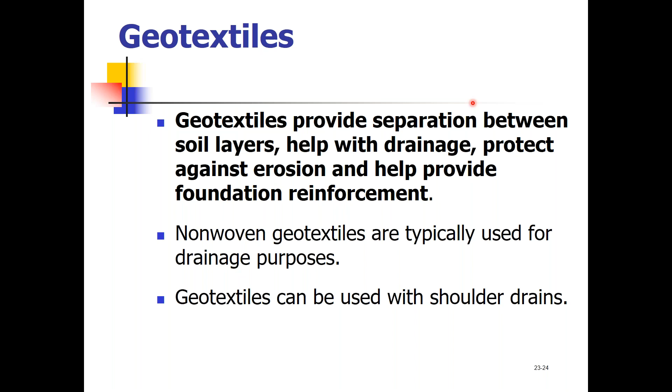When we are using geotextiles, we typically use the non-woven geotextiles. That allows the water to get through the geotextile instead of pooling. And we do also use our geotextiles when we're setting out our shoulder drains as well. To give you an idea of what I'm talking about, we have our pavement layer right here. We have our aggregate layer, and then we have our subgrade, our soil, the base from which we're working. If you'll notice, we place the geotextile material in between the aggregate and the subgrade. We talked a little about this, I believe, in the first webinar. Let me show this to you.

You can see without a fabric in there that there is no way to separate the rock from the soil. And so when a tire goes over that area, it's going to press the rock down. It's going to press the soil down. That's not very good compaction, which we spent a lot of time at the end of Thursday's webinar talking about.

But notice when we put the geotextile between the soil and the rock, it gives a layer of extra protection there that allows the two ingredients to stay separate, and it also gives us a much stronger base to work from. Notice there's a whole lot of air voids and area between the rocks and the soil right there, but with the fabric, it allows the soil to stay where it is.

It allows the rock to stay where it is, and we are able to get those air voids out, hopefully allowing for a much smoother ride for the motorist. But even more so than that, we're allowing for them to have the opportunity to have that road last a whole lot longer, so we're not having to dip into taxpayer funds.

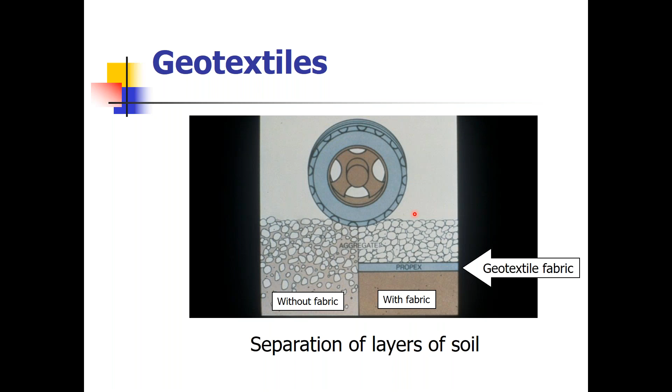When we talk about shoulder drains, which we mentioned two slides previously, I want to give you an idea of what that might look like. You see we have the pavement on top as it was previously shown. We've got some soil out here. We would represent a fabric, a geosynthetic, right in there, geotextile. Again, we have some aggregate, and notice we've got our pipe right there.

And what we want to make sure, and this picture doesn't do it maybe to the level that I would like, we want to get as much of the air voids out of that area as we can to make sure we've got good compaction. What we don't want to have happen is as vehicles, especially the larger, heavier vehicles, go over our pavement, that gets pressed down, this gets pressed down. You don't want a ton of air voids in there. We want to make sure we get that out as much as possible.

But this is our spot. This is where we want the water to flow through. And if we don't have good compaction around it, that pipe is liable to give. It may sink, it may roll to the side a little bit. And again, we're not going to have water flowing the way that we want it to. And of course, it's not exactly to scale. Our pipes would be larger than that. But this is how it should look on a subsurface or a shoulder drain.

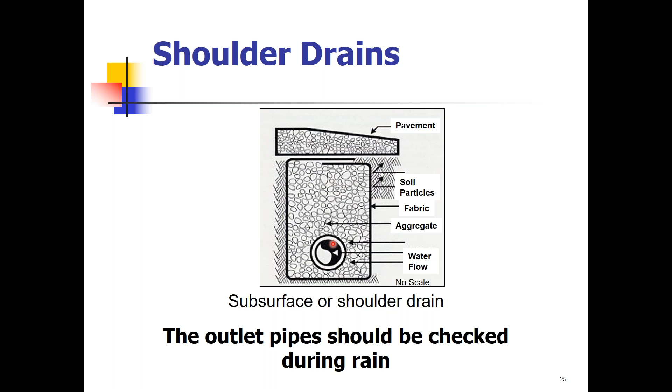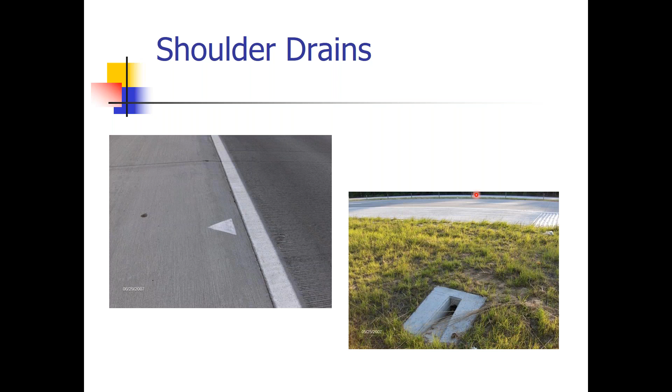And we're going to spend a lot of time today talking about when it's raining, what we're looking for. It's really important to check your outlet pipes when it's raining to make sure they are fully flowing, not partially blocked nor damaged or cracked. Sometimes we have vegetation that grows up in between them. So it's good to inspect those on a rainy day as often as possible. We have some shoulder drains here. Here's a nice example of one out here. Hopefully that water is getting off the road and getting down to where it needs to go.

Here's a median shoulder with a drain outlet, and this is not a guardrail class, but I do want to touch on something while we have this cable guide rail or guardrail up here, depending on what your state refers to it as. Oftentimes, when we talk about cleaning back the area, we've talked about making sure that it's free of debris and vegetation that may block the flow of the water. So what we'll often do is come out here and spray chemicals and such to clear back this area.

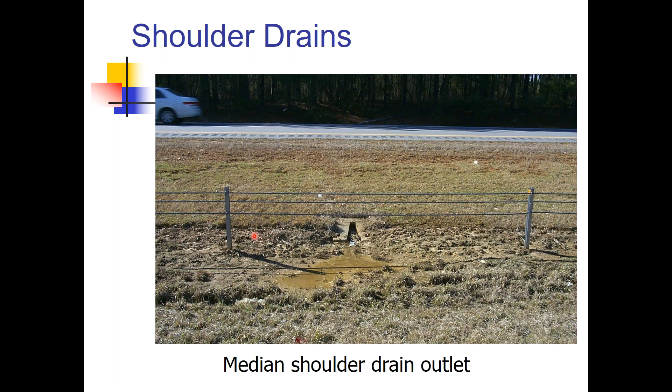One thing to be mindful and careful of when you come out here and you're spraying chemicals: over time that actually weakens the soil that's around these posts. And even though you may not physically be able to tell it with your naked eye, those posts are not mounted as well because that soil is loose. And if a vehicle goes off the road and hits the cable guide rail, it may not function the way that you want it to. So please keep that in mind when you're doing your maintenance work around these cable guide rails or guardrail, that we're not destabilizing the soil too much, or this will not function the way that we need it to.

Depending on the state that you're in, you do not want to exceed how much space you have between catch basins. Some states have 400 foot as their maximum spacing. Other states have different ones. Make sure you consult with your engineers just to make sure they're at the correct spacing.

In a vertical sag location, it's a really good idea to have more than one catch basin because we want to keep that water from ponding. And if one of those inlets gets clogged, that water is going to come right out onto the road. So oftentimes we'll put more than one catch basin to kind of help reduce the potential for that ponding. Or if one gets clogged, there's still one that's flowing.

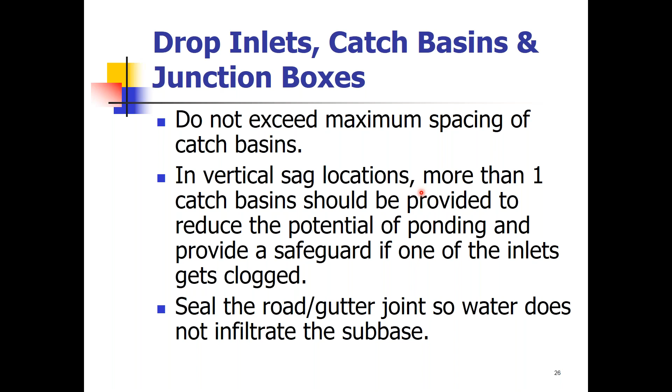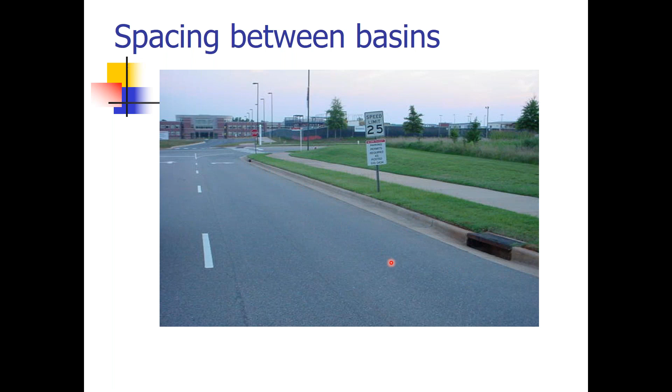We talked in our first webinar, make sure the joints are sealed properly, the road joints, the gutter joints, just to make sure water's not getting into our subbase. We're keeping that away as best we possibly can. Here's some spacing between basins. That's a good spacing because what one basin doesn't catch, hopefully the next one will. And again, our goal this entire series of webinars has been capture the water, get a hold of it before it actually makes it out into the highway area.

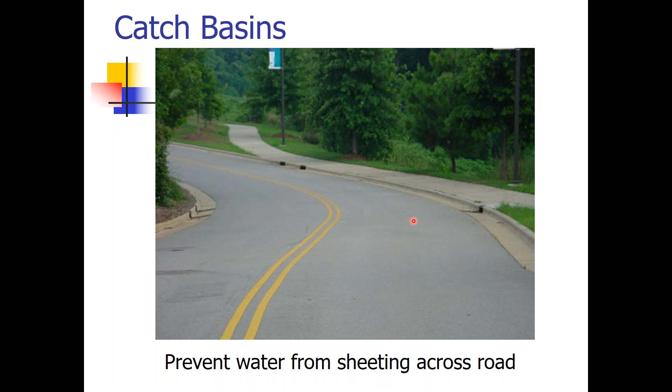And to that point, we have some more basins that are connected up here, and we actually have a third one out here. And the idea is we are defending the road. We are keeping it from ponding or the water sheeting across the road and thereby creating a hydroplaning issue for the motorists, especially coming around curves when they are not able to see what's coming. If there's water pooling or standing right there, they're going to run right through it. So let's help the motoring public as best we can to keep this from taking place.

Now, again, still part of a drainage course, but I do want to touch on this. We have bicycle safe grates that we put down. And the reason we put down these bicycle safe grates is exactly what it says. Well, bicycles tend to run over them. We don't want bicyclists catching their wheels into the grate. That, number one, becomes a tripping hazard, it's a falling hazard. And unfortunately, in our country, one of the items in pedestrian and bicycle safety are traumatic brain injuries. And this could be a potential for someone to suffer one of those injuries. So we make sure we use bicycle safe grates.

By the same token, and again, this is not an ADA class, but be thinking about this when you're looking at your items. You want to make sure that if a person is walking, let's say with a cane, and they're tapping that cane, that there's no potential for that cane to get wedged in those areas in the grate. If that happens, that's a very serious tripping hazard, especially for those that need a little more help. So let's make sure we don't have these too wide. It's very important, not only on the pedestrian side but on the bicycle side. Together, they work as part of our drainage system.

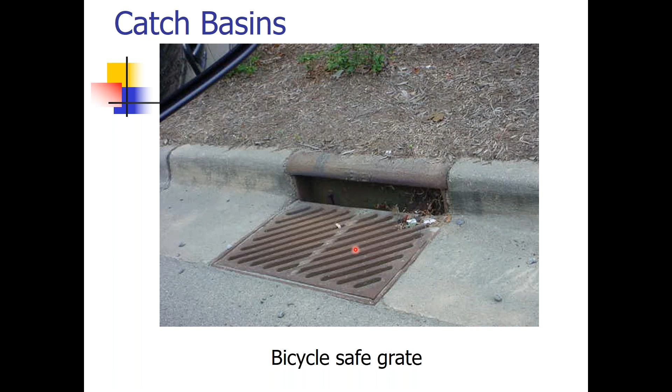Here's more than one catch basin in a sag vertical. Again, that's a low spot. So we have not one, but we have two to help collect as much water as we possibly can.

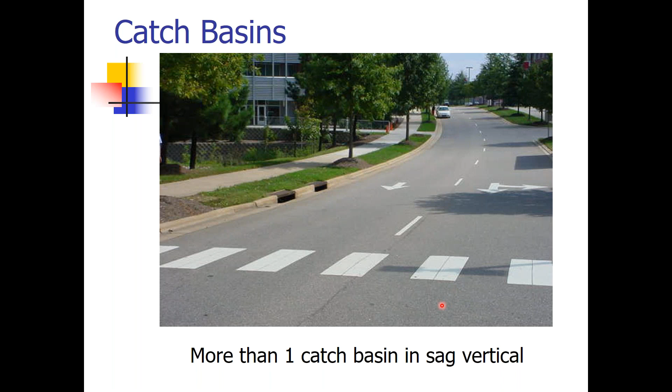I want to talk about some of the old designs on the catch basins, on the inlets. And I say old design because you'll still see these type of designs out there depending on where you are. And again, we're not going to spend a ton of money coming in and pulling all that out and retrofitting those typically until it's a necessary design that we need to undertake. But this is the old inlet design. And you can see where there's all this cracking taking place, and the pavement needs help.

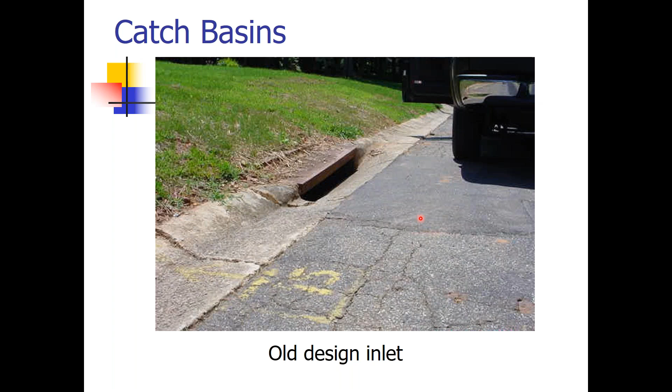What happens when we go and we resurface this? Well, unfortunately, if we're not careful, our catch basin could end up looking a little something like this. Hopefully you can see that very well. What they did is they came in and they resurfaced the pavement, but unfortunately, there's very little opportunity for water to make it into that catch basin. So what do we have to do? Well, you're going to have to come in and cut this out so that the water can flow properly. You may actually fix the older inlet design at that time, but you're going to have to do something to keep that water flowing and getting where it needs to go.

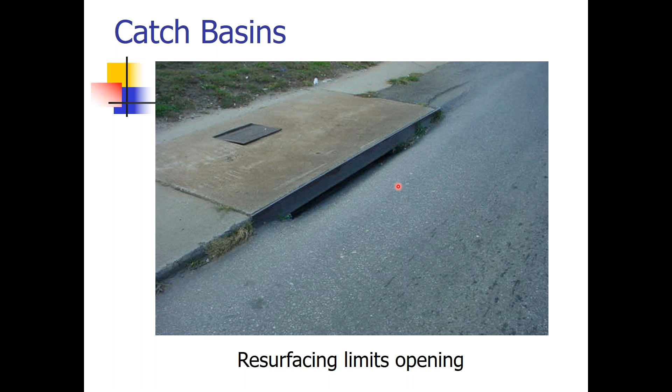This probably is something everyone on this call has seen before, and those are catch basins that have a whole lot of dirt, whole lot of soil, whole lot of grass in them. And this is not something that sprang up yesterday. It's been growing for a while.

It is critically important that we do our maintenance as often as possible and keep up on things as best we can, because as these things begin to back up, water is not going to flow into that, obviously, but where will the water go? Well, the water is going to go here, and then it's going to go out, and it's going to go around. And again, it may end up back over here, but the problem is it's going to end up on the pavement. And you can already see a little bit of cracking taking place there. And it's also a ponding hazard, a hydroplaning hazard as well. So routine maintenance, very, very critical.

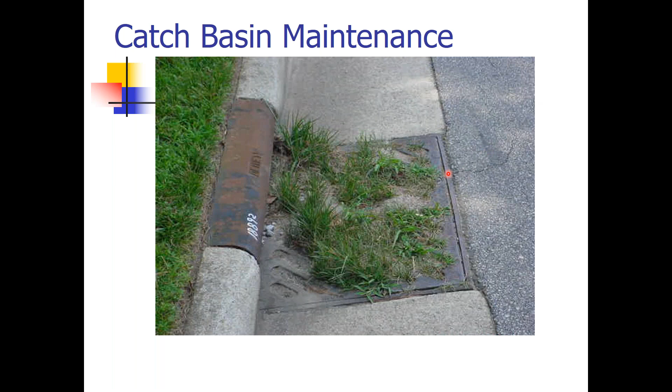Now, this is especially true around the fall, because you end up with situations sometimes like this, where a well-meaning homeowner has stuck all of their leaves, all their little twigs, all their dirt into the catch basin. I can't tell you why they thought that was a good idea. I can only tell you experience has taught me this happens more often than I really want to think about and admit. And so what happens, we have to come in and we have to clean this catch basin out, whether we're using a vacuum truck, whatever it is, we have to clean it out so the water is going to flow properly into the catch basin.

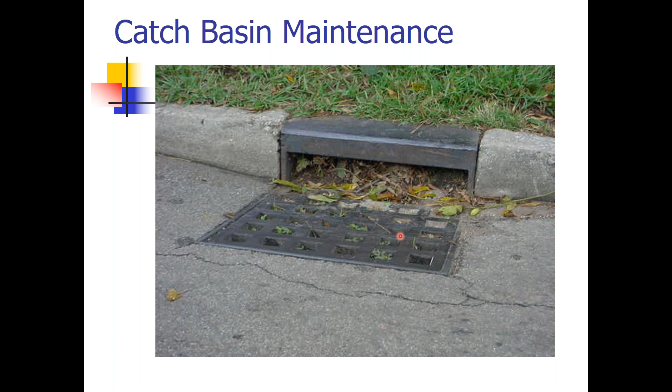Certain areas tend to flood more, especially in new construction areas where there's no drainage set up. Oftentimes we'll see signs, left lane closed due to water or whatever. Make sure that in construction areas that you are keeping an eye on the maintenance and the water's flowing the way that it needs to.

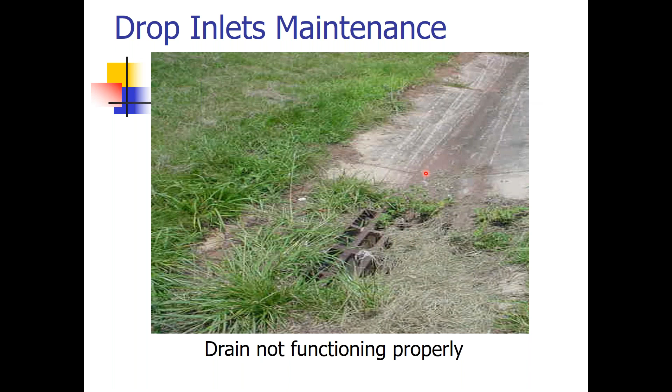Perhaps we'd have an issue like this where the water's supposed to flow and then you have a massive drop right here. I assure you, no water from here is ever going to make it to that drop inlet. We need to make sure that we build this area back up, that we grade it, that we get compaction, that it's smooth, and the water is able to flow to the actual drop inlet. It does no good to have this out there if the water's never going to make it to it.

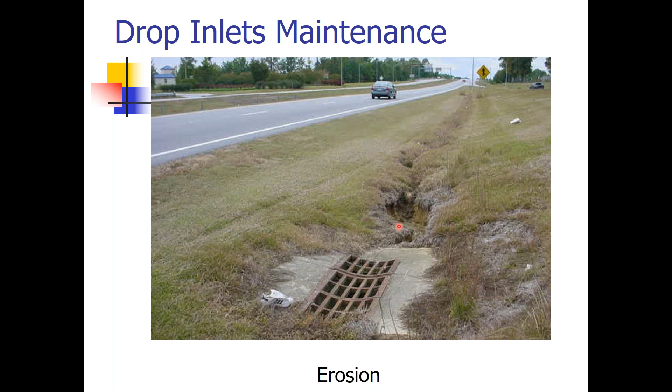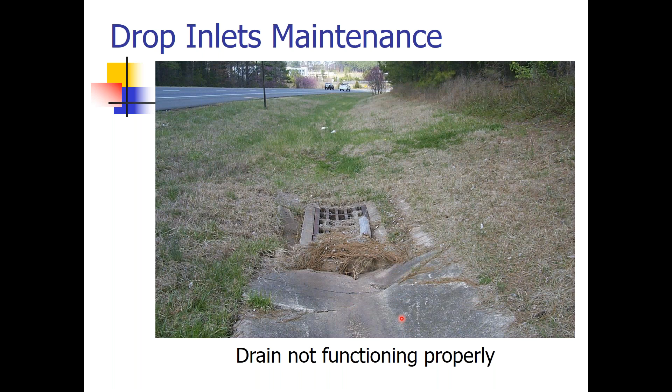Here's another example of a drop inlet. It's just not functioning the way that we want it to. Again, you want to make sure you clear all this back so the water is able to flow properly down that paved flume to get to the drop inlet.

And again, we talked just a few slides ago about when you spray herbicide under the cable guide rail, you want to make sure that you don't do it over long periods of time because that gets destabilized. And if a vehicle hits that and that gives at all and it pushes into this area, it can cause some major issues for the motorist. So we want to make sure that we're being conscious of what we're putting out there. Now, let's play a little game of hide and seek.

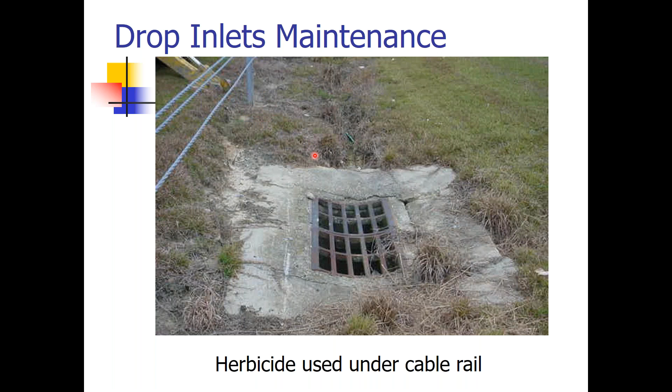There is a drop inlet in this picture, but I want you to look at it, and obviously I can't see your response, but just take a moment and with your finger, I want you to point on your screen where you think the drop inlet might be, because there absolutely is one there. So just take a second and look around in this picture and just kind of think where it might be.

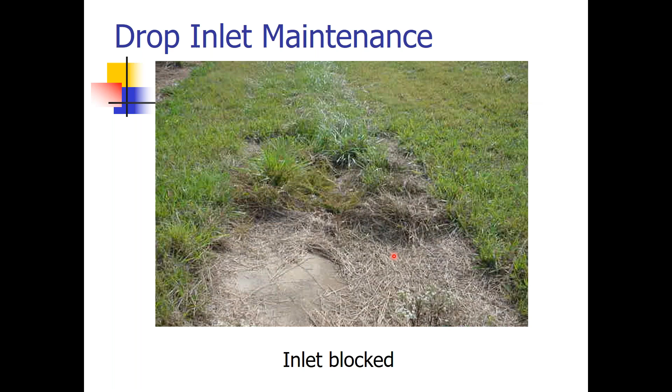And once you've done that, let's go ahead and look and see when I pulled it back a little bit, where the drop inlet actually was. And there, I pulled back just enough so we're able to see where the drop inlet actually is. And is that a major problem? Oh, I think it's a very major problem because that water is not flowing anywhere but over the top of it. So we want to make sure when we're looking at drop inlet maintenance, when we're doing our rainy day patrols, when we're identifying where our inlets are, make sure that they're open and free and clean.

Here's some more drop inlet maintenance. We've got some high water or some high vegetation here. We want to make sure the water is able to make it to the drop inlet entrance, and we want to get that cleaned back as best we can as well. Not just drop inlets, not just catch basins. I want to touch briefly on junction boxes and maintenance.

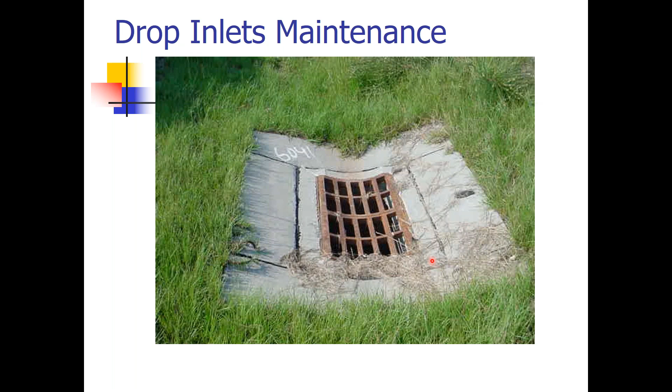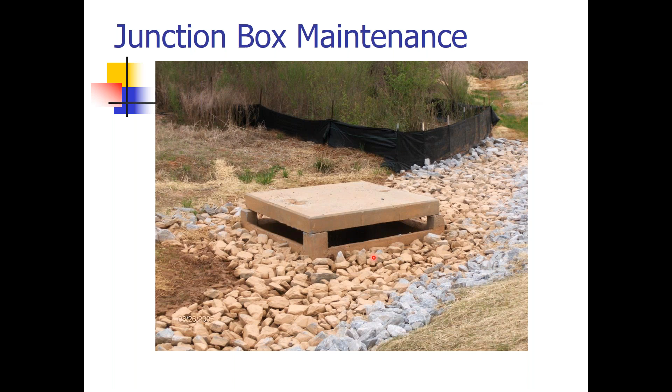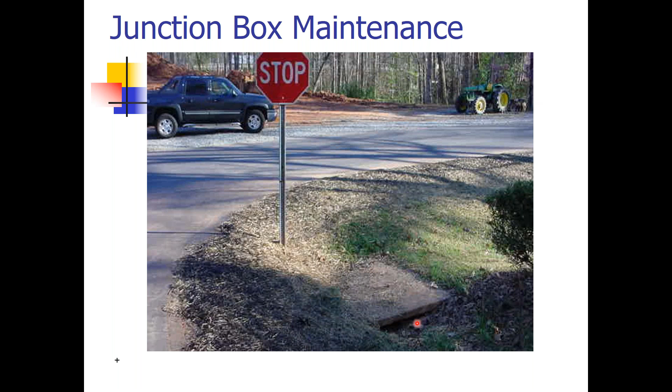Here's another junction box. We could probably clean that up a little bit so that the water is able to flow freely the way that we want. Now, having looked at junction boxes, I want to talk really briefly about box culverts. And I want to point this out because I think it's really important. Routine maintenance of your box culverts is just as important as if you're looking at pipes and as you're looking at ditches. If there's some type of drop off at the end of a box culvert, it's usually tied to the fact that there's some erosion around the outlet, and we'll talk a little bit about that here in just a minute.

And this is one I want you to underline. If you have the printout, I want you to highlight it. I want you to put an asterisk beside it. We do not use riprap in live streams. What does it mean that we do not use riprap in live streams? Well, you remember, if you were with us on Thursday, we talked about riprap and rock check dams and using rock so the water flows through the stone, through the rock, but the rock is able to block out the impurities, the silt, the sediment, the dirt, whatever it's pulling with it.

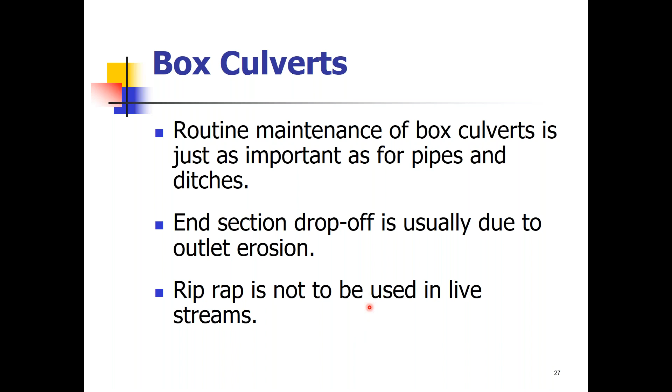When we place riprap in a live stream, we run the risk of that stone or that rock being carried by the live stream down to our piping, down to our inlets, down to our basin. So we want to make sure we are not putting riprap in a live stream. If we have riprap in an area and there's a live stream coming through, we need to get that out as soon as possible.

Again, box culvert maintenance, we want to make sure they stay clean, they stay clear of debris. Depending on the area that you're in the country, there may be critters and such up in there. Please be very careful when you're talking about box culvert maintenance. Be responsible. Be very, very careful and be mindful of your areas. And again, that may not be confined space required because it's pretty open. But that also means you can get some bigger things in there.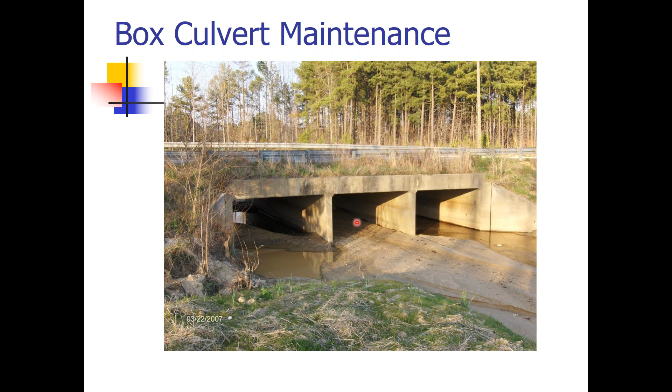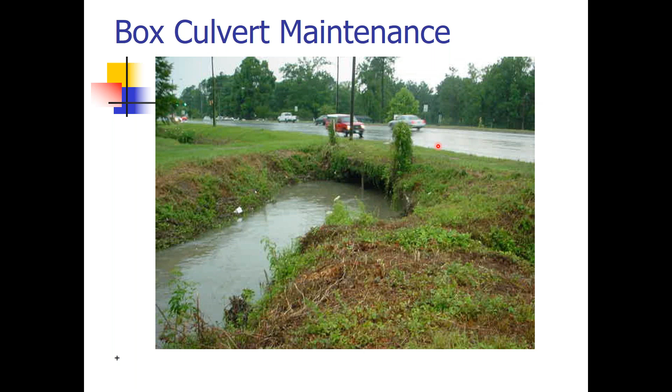So please, as part of your safety, I know you're wearing your PPE, your personal protective equipment, but just be mindful of the areas that you're stepping in and what you're doing. Again, here's another example. It's just some box culvert maintenance that needs to be done. Again, we've got a lot of water flowing through there. I want water flowing through there. Remember, we want to get it away from the roadway as quickly as possible. If we can't intercept the water, at least get it away from the roadway as quickly as we can.

I want to touch on end treatments. They're very important. In guardrail, we understand we put in treatments on the end, very simply put, because if someone hits them, we want to make sure the person survives. They don't get speared. On the drainage side, when we put in end treatments, there's a little bit different reason for what we do. We use end treatments when we need to stabilize the slope that is behind a pipe end.

And I'll put this out to everyone. Go ahead and answer in the chat box if you would. What might be some of the reasons we need to stabilize the slope behind the end of the pipe where the pipe is sticking out? What might be some of the reasons we need to stabilize the slope area? So I'm going to step away for a moment. If you'll go ahead and start typing your responses.

They've put in prevent scour, erosion, landslides near edge of road, pavement infiltration to avoid water undermining the pipe, to avoid settlement, scour prevention, lack of right-of-way to allow proper slope, end of water flow, filling head wall, control slope, and control speed of drainage, hold roadway in place, slow down outlet water. And all of those are excellent answers, and they're all correct. I want to add one more to it, and Victoria, if you read it, I do apologize, but I don't think I heard it.

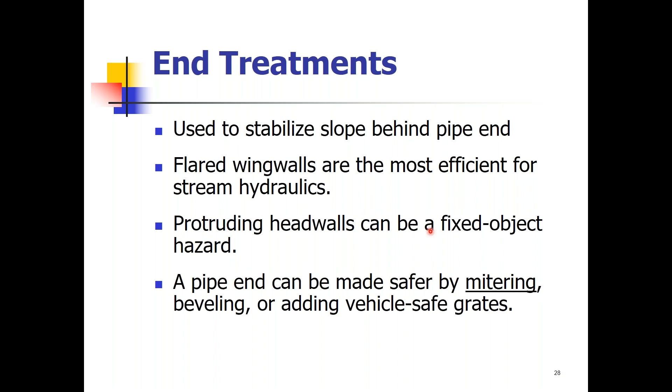And then we're going to talk about how a pipe end might be made safer by mitering it. Maybe we bevel it. And then we're going to look at what are called vehicle safe grates as well. Again, this is a mitered end. You can tell if you stuck that pipe out further, it would be very difficult to get coverage based on that area. So we come in, we miter that end, we cut it so that we have less need for a bunch of fill and compaction. We don't have a lot of room there, but also notice water's still going to flow out of that.

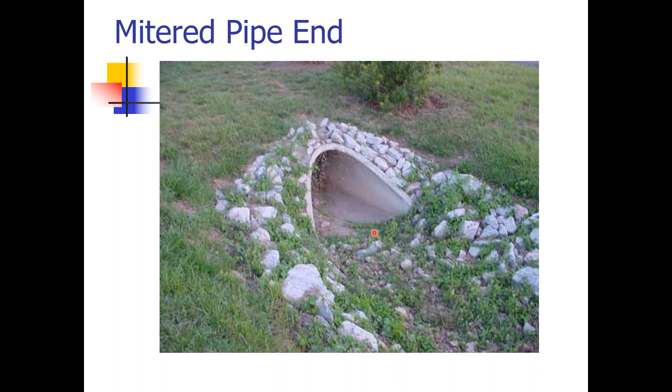Instead of it being rounded, it's going to flow in a little bit different way. It's going to move a lot. We still have to worry about scouring or erosion right here where the mitered end of the pipe, in this case a concrete reinforced pipe, meets where the soil is. But that's one of the things that you want to look for when you're doing a rainy day patrol or some form of an inspection.

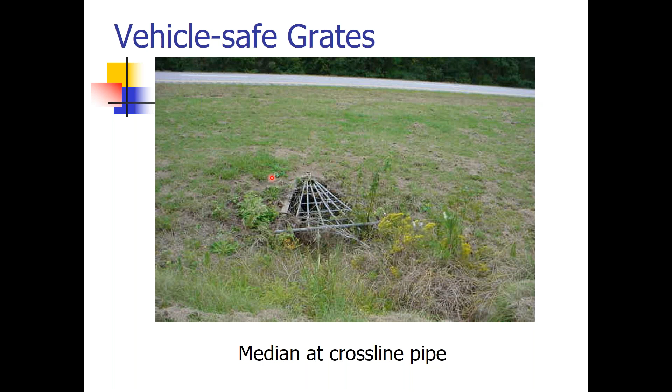Here's another median. We have a cross line pipe. What is a cross line pipe? Well, it basically goes across the roadway, and they put something over it to just be safe in case something were to drive over it. Again, I would hope no vehicle made it out there, but as everyone is fully aware, things do happen. They happen very quickly.

We talked about flared wing walls. Here's an example of one, and I just want to take a minute or two on this. You can see that's a very large reinforced concrete pipe. That's excellent. It's rounded. But notice, instead of just leaving the pipe rounded out there, and this is the term that's up there, they flared them out to the side. And the reason that they flare those out to the side is as the water rushes through, especially if there's a lot of volume coming through in that waterway, it's not just going to hit here and then stop. It's actually allowed to flow out to the side.

So hopefully the water doesn't back up. And those are really good. And you can tell they've got riprap, they've got stone around it. That's a really nice setup.

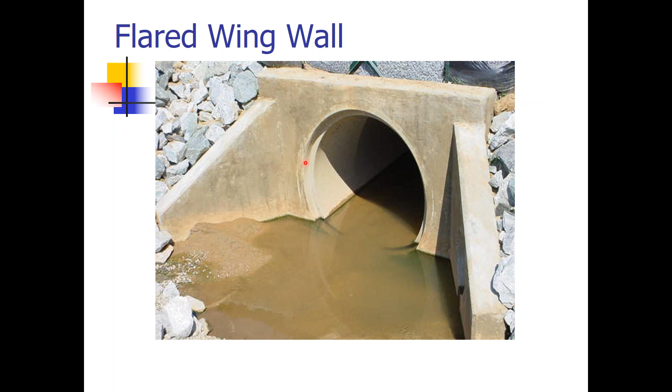But here's where fixed object hazards come into play, especially if you're dealing with any older designs of these, and it may look a little something like this, may not look like that in your area. But the reason that these become fixed object hazards is because, whereas this one's a little tougher to hit, and again, we can't see the roadway exactly, we can see here that if a vehicle goes off the road and it were to strike that reinforced concrete, it's definitely going to do damage to the vehicle.

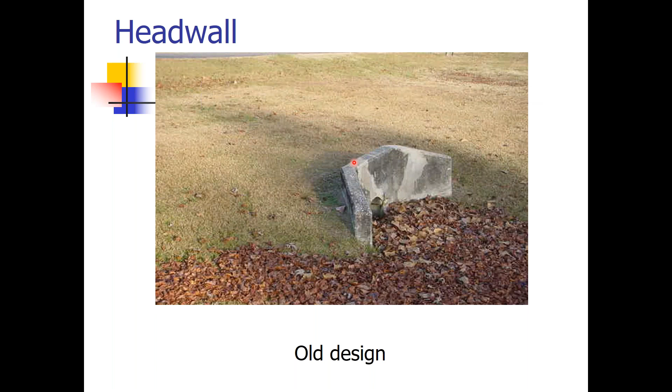Now, when we hit crash tested stuff, it can still damage a vehicle. That's not to be avoided, but there should not be fear by the motorist of losing their life. You hit this thing going really, really fast, that could cause a severe problem. So again, this is the old design, and unfortunately, this creates a bit of a fixed object hazard. We want to address that if we can and as the budget allows.

Again, here's just a basic head wall. It's not the flared wing wall, so this means all you're going to have is the water flowing through the rounded pipe. And there is the potential, even though you have riprap, you have rock on either side, that water might back up. And that's the difference with why the flared wing wall may be better for getting a large amount of water through as quickly as possible.

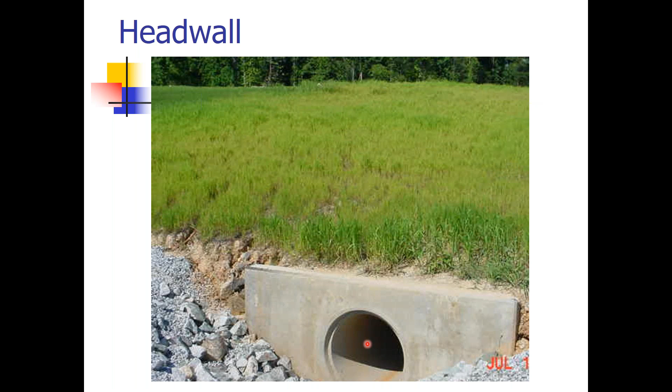We go into neighborhoods, you see a lot of these driveway pipes and these head walls in there. Again, how much water are we moving? I don't know. It depends. But you need to make sure the water is flowing, and then you need to make sure this ditch area is the right shape, so it's going to move a good amount of water, hopefully down through the next driveway pipe until we get it to where it's going to go.

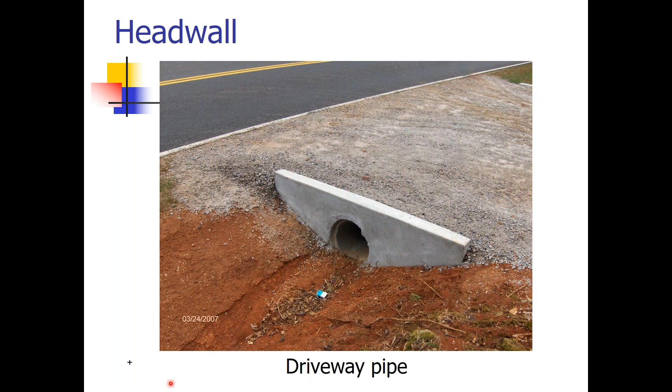When we talk about appurtenant structures, what are appurtenant structures? Well, we use them to maybe improve what our drainage is doing, or maybe we have an erosion problem and we want to be able to reduce how much erosion we have. We use energy dissipators for appurtenant structures. This is where we talk about using riprap. And the reason we often use riprap is not just to stop the soil or the dirt from moving, but also it's going to slow down the flow of water, especially in places where the velocity is really, really high.

Water's flowing and it's flowing hard, and it's going to cause erosion. We will put riprap in there to slow that water down. Again, not just because we're worried about what's getting into our catch basins or into our drop inlets. We're concerned about how fast the water's going. And if it causes erosion, all that work we have up here is for naught, because the water's never going to get where we want it to go.

We use funnel drains sometimes to collect surface water, especially on roadways that become what are termed high fill sections. In other words, there's a lot of fill taking place and there's a lot of water moving through. So we will use funnel drains to help with that as part of our drainage system.

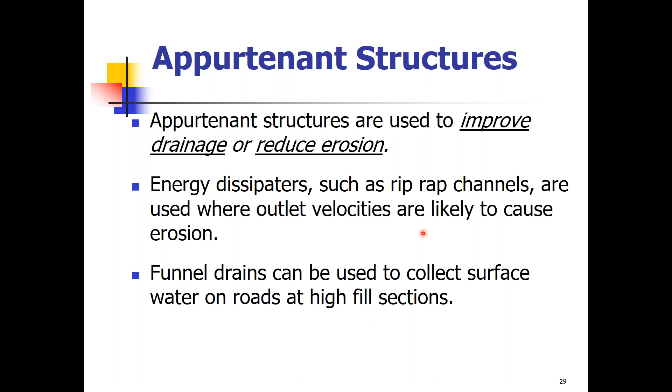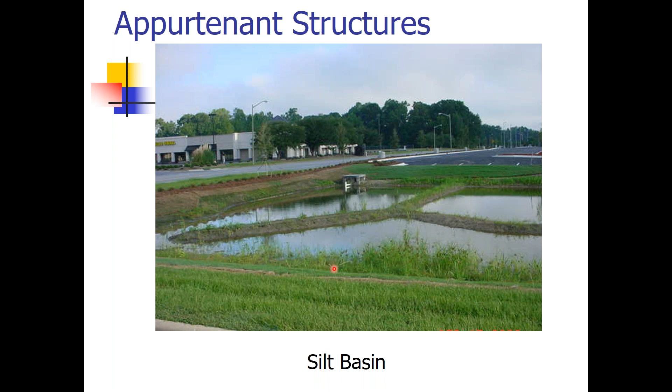Here's just an example of a silt basin. We have the water being captured right here. And if that's not something you use, you might be a little more familiar with a silt basin that looks a little something like this.

Now, once the drainage is done, if we're not expecting water to flow through that area, go ahead and get that riprap out. You don't need it there because depending on how close the roadway is to that riprap channel, that can become a fixed object hazard. So you want to make sure we get that out if it's no longer being used or if it's no longer necessary.

Again, we talked about funnel drains a couple of slides ago. These are excellent ways to get water off the roadway, especially on high-speed roadways where you expect a lot of water to accumulate in a storm. Depending on where you are, you may have those microburst storms, those flare-ups like we have where I am, and they'll just pop up and they'll blow very hard, almost hurricane-like for about 5 minutes and drop a whole lot of water, and then poof, it's gone. It's sunny again. So if you anticipate there's a lot of water that can accumulate and be dropped, go ahead and put those funnel drains in. Those are excellent.

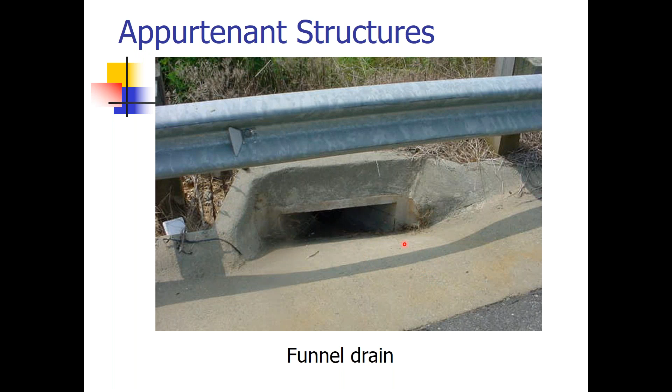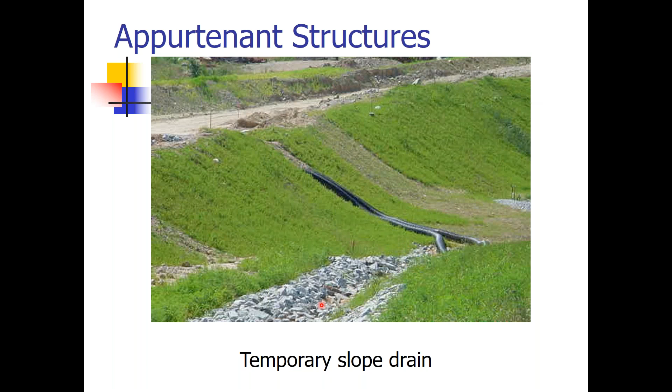And you saw this in the slide before, but these temporary slope drains, that's what this is showing. They're temporary. They're not meant to be long-term, but again, we're getting water through and then we're pushing it down through the riprap that is there.

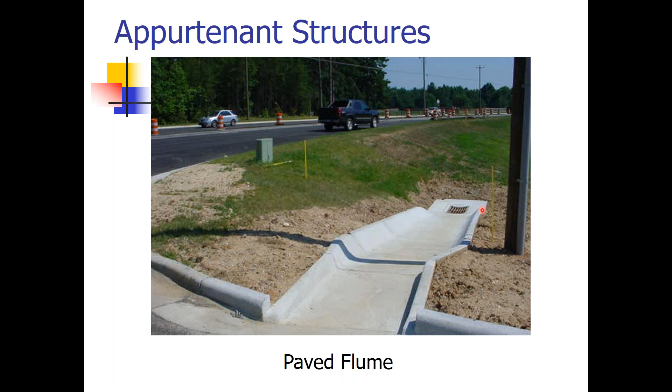It's also possible to use a paved flume. When I think of flume, I think of my favorite place in the world, which is Disney World in Orlando, which of course none of us can go to, but they have the Splash Mountain flume, and this works just like Splash Mountain. You get to the top here, then it's going to move down very quickly. That's where the water goes, and hopefully get it off the roadway and out to the catch basin and as far away from the road area as we can.

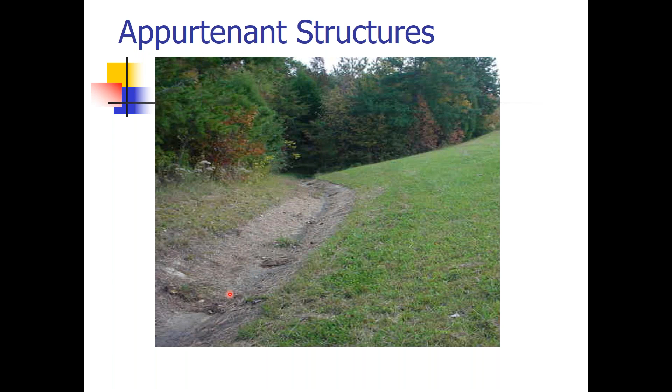Again, here's a good example. If you can get the water to flow down and away from the roadway out here, that's a good use of an appurtenant structure because you're getting the water out towards the vegetative area, the natural areas of the roadway. Here's an appurtenant structure where we've got water pooling. It's ponding on the road, but it is flowing off onto this appurtenant structure, off onto this paved flume, so we can get the water away, hopefully, as quickly as possible.

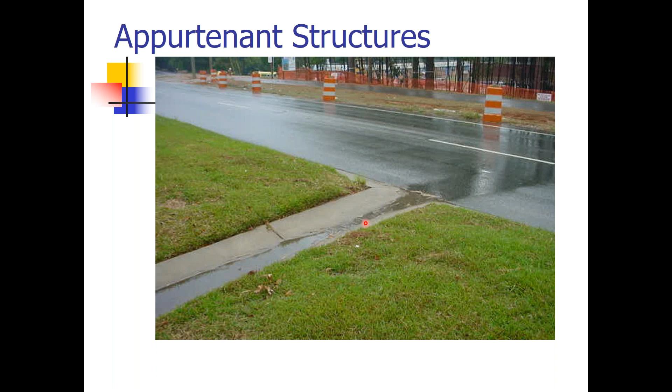Some people have actually used a paved ditch to a lateral ditch. That's fine. Again, the concern is get the water off the road, get it out to that lateral ditch in that vegetative area. So these are good examples of some drainage components and systems that are working.

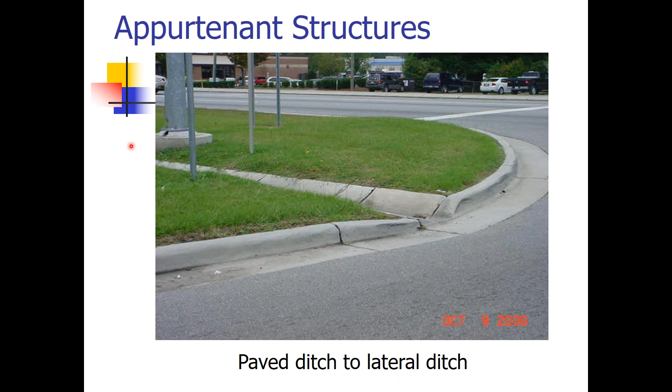But here's one that may need some work, and that is slope drain maintenance, because we've got a slope drain out here, and that's a pretty good entrance area. That's a good sized mouth, but the problem is if the rain and the water comes here, it literally has to go up that little embankment and into the slope drain, and that's really not how it's going to work.

From a hydrology standpoint, that's not how water is going to flow. So we have to somehow figure out a way to build this up, get this graded properly so the water, when it flows, will flow directly into the slope drain. Otherwise, it's meaningless to have it out there if it's not functioning properly.

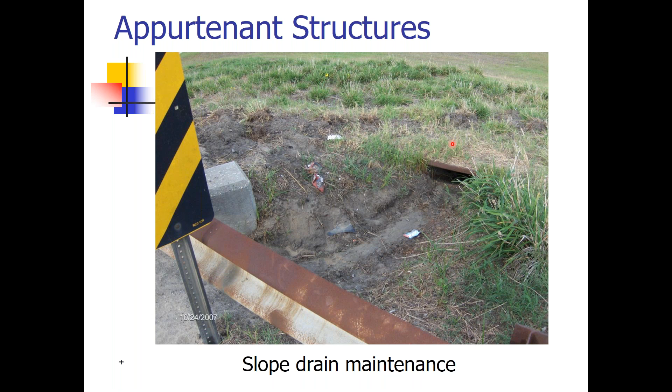And that leads us to inspection, which is the last part that we want to talk about. And when we're talking about inspection, there's a couple of good times during the year to do that. In the springtime, when you're getting showers, in the fall, when you're getting showers and the weather's changing, leaves are falling, that's a really good time to do your inspection. Or if you have a heavy rainstorm, if you have your 5-year storm, your 10-year storm, or God forbid, and I already saw there's one out just off the coast of Florida, has a 50-50 chance of developing.

If you're in an area where tropical storms and hurricanes like to come visit, you want to make sure you are checking, because when those storms hit, it's difficult, almost impossible for our systems to hold that much water. But if they're blocked and they're not flowing properly now, it's only going to make things worse. So you want to make sure you get your inspection in, not just in the spring and fall, not just after heavy rains, but as often as you possibly can.

And now the problem is there's cracking happening underneath because as the traffic goes over it and it's pressing down so hard, as that subbase and subgrade is shifting and giving, and it's moving underneath, that pavement that's being pressed down doesn't have a firm foundation to hold, and so it's going to start to crack as that water begins to wear away the soil that's underneath it.

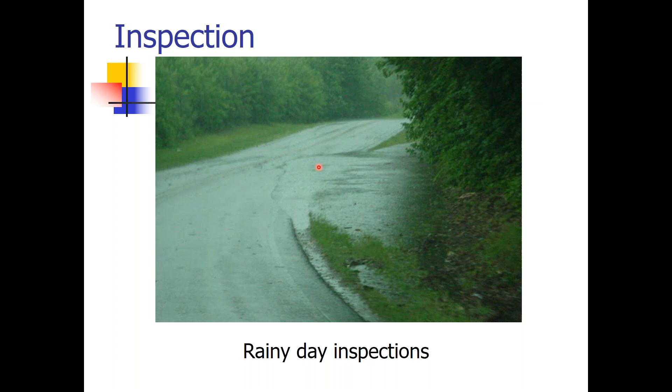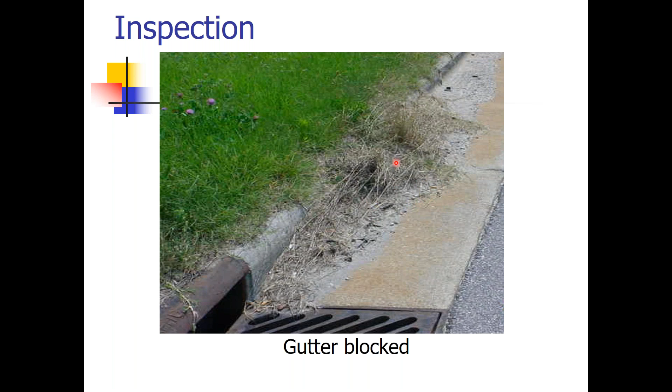One of the more common ones that we see around the country as well is easily preventable, and that's by doing preventative maintenance, and that's coming in here and cleaning this stuff back. Get it pushed back so the water, when it flows, will flow to the grate as it's supposed to. We talked about bicyclists and grates and making sure they're bicycle safe. We talked about pedestrian safety, especially for those with ADA. This also can be a hazard for someone who is a bicyclist or has an ADA issue. You want to make sure that we have that area cleaned back for them. So again, it's not a tripping hazard. It's not something that's going to hurt anyone.

Here's some curb and gutter section that really needed the proper slope put on it. What does that mean? That means if it's even and it's flat and it's straight, that water has nowhere to go. It's just going to sit.

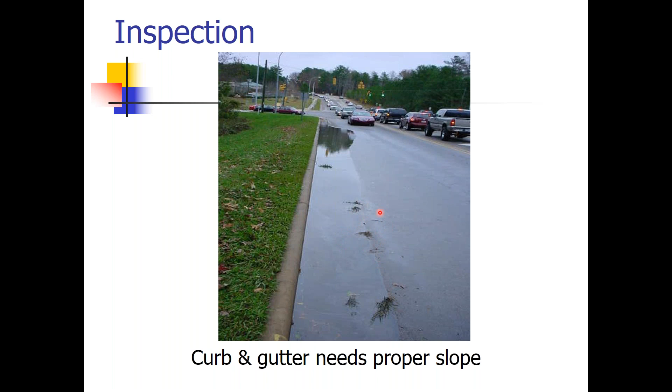If that water is not sloping towards the gutter and section, the water's not getting where we need it to do. And as we've talked about a whole lot, as that water sits, it eventually begins to matriculate and infiltrate under that pavement. And as we saw a few slides ago, the subgrade may get damaged, the subbase may get damaged. And when that happens, we're going to have cracking taking place on that roadway.

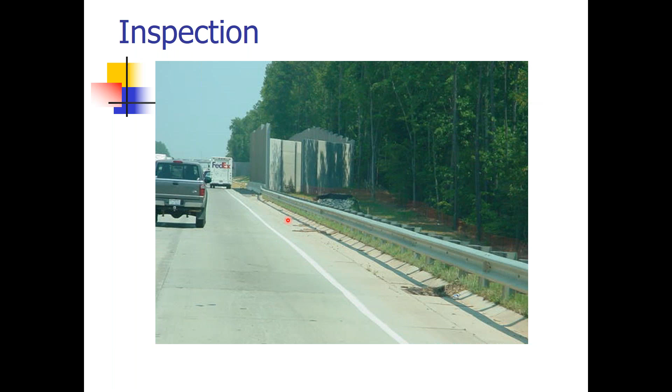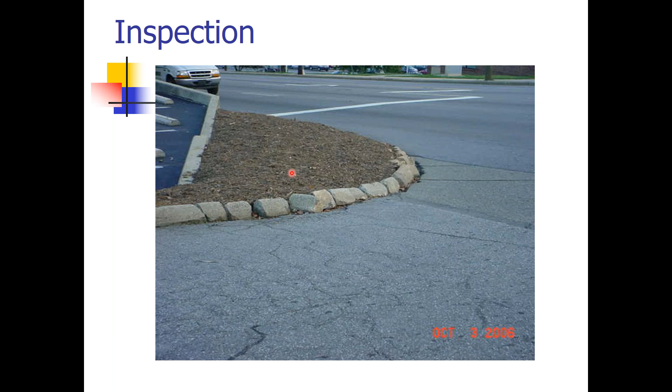Again, common areas that we deal with, standing water in the roadway is an issue that we do have to look at. And again, it's not just the damage to the roadway, it's the immediate damage that can take place if a vehicle loses control and strikes another vehicle, strikes a fixed hazard object, maybe they roll their vehicle. So we're not just maintaining our drainage systems to keep water off the roadway because we don't want our roads being damaged. We have to think about the lives of the motorists as well.

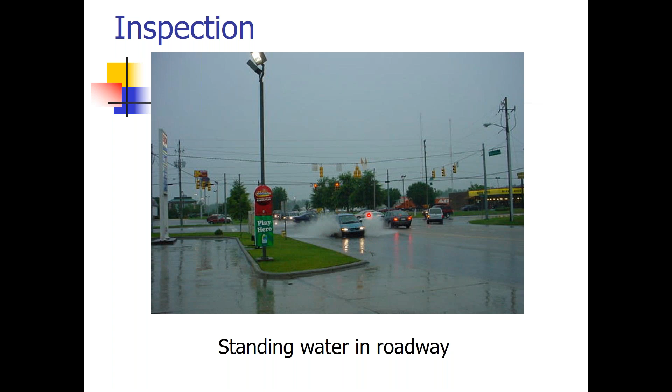And sometimes we'll be asked in our work zone classes, well, it's not fair that I have to think about all these other things. Well, this is part of the job that we take on when we work in drainage. We're not just thinking about the roadway, we're thinking about the people on it, whether they think of us or not. It's our job to think of them and their safety, just as it's important for us to look out for one another and our safety as well.

Here's some standing water. Again, right at the edge of the pavement, I'm going to guess the shoulder's probably too high, which means there's nowhere for the water to flow, which means we're going to have infiltration taking place. Over time, if you're not careful, you may see some areas that have some pools of water on the pavement. That can sometimes mean maybe there's not the crown on the road that we need. Other times, it could possibly mean that there's a depression because there was a settlement in a pipe underneath the roadway. So we need to consider that possibility as well.

And to that end, I have a question I've been sitting on for the first 2 3/4 webinars. So I want to ask it now. I want you to weigh in in the chat box. At what point does it become our responsibility as a public agency to address the water issues if it's from a private property, if it's from a business owner or a homeowner where water is flowing out into the roadway because something is blocked on their property? At what point are we allowed to step in and address that? Go ahead and weigh in with how your jurisdiction, your agency handles that. I'd love to get a little feedback on that from you if you don't mind.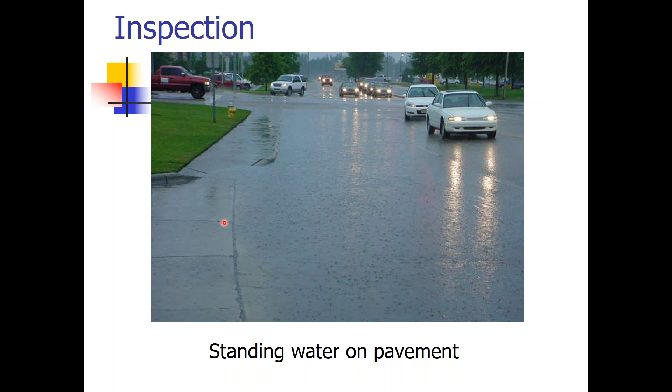The DOTs I've worked at and worked with, we could come in and we could repipe all this and do the work, but we required that you paid us for the machine use, for the labor, and we requested that money up front. We would come in and do it. If our resident engineer or our city engineer would sign off on that, we could be assigned to do that. You may be allowed to do that. You may not be allowed to charge the homeowner depending on where you are. That was my experience in the 2 states that I've worked in.

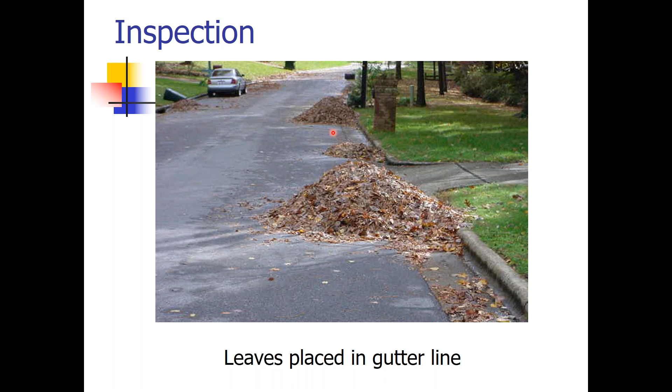It's always wonderful when our homeowners leave their leaves in the gutter line. Now, to be fair, there are some local agencies around me that want their people putting their leaves out there in the roadway, and they're going to come by and suck them up with the vacuum truck. If that works for you, that's great. But if that's not something that you do, or if that's a huge expense for you, this can create a really serious problem for water flowing, because if we don't get this stuff cleaned out quickly, and let's say a rainstorm comes, oftentimes we end up with something that looks a little something like this. Maybe not exactly, but this gives us a general idea.

And you can see that water is flowing, but it's hit a very large stack of leaves, and now it's just going around. And if that's the grade, or if that's the catch basin, the curb and gutter section where the water is supposed to leave the roadway, we've got a problem because the water hasn't left the roadway. And again, especially on curved roads, but it can be straight roads, narrow roads, insert whatever type of road you want based on your jurisdiction. It's a problem, and we need to get it addressed, hopefully as soon as we can.

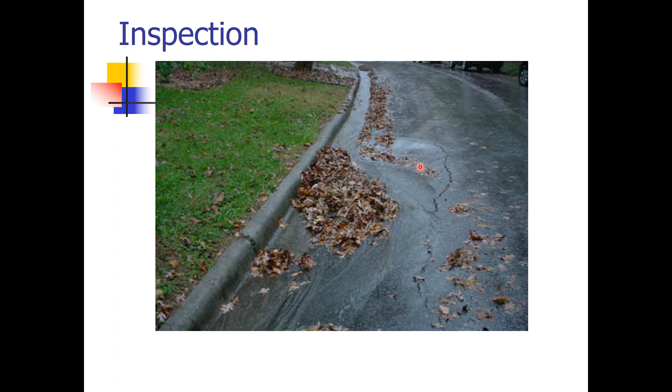We talk about inspection. We can see the water's flowing pretty well. Yes, we have some leaves there, and unfortunately, leaves are going to get down there. We can't always prevent that, especially as the rain falls and it washes some of the loose leaves away. They're going to hit the pavement. You can see them hitting the grass. Unfortunately, this is part of life, so we are going to have to keep an eye on these when we're inspecting and make sure they stay cleaned out, because debris is going to get into it. Even on our best days and our best abilities, that's still part of what's going to happen.

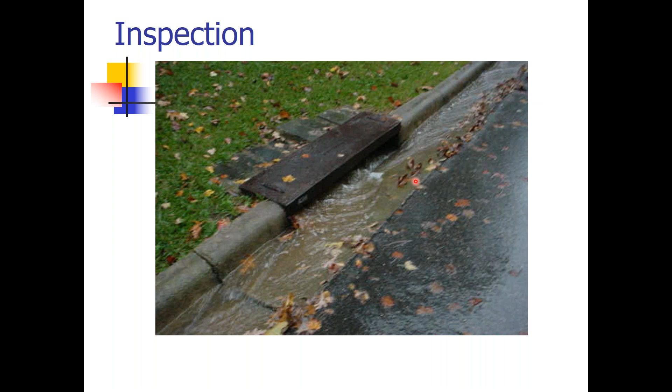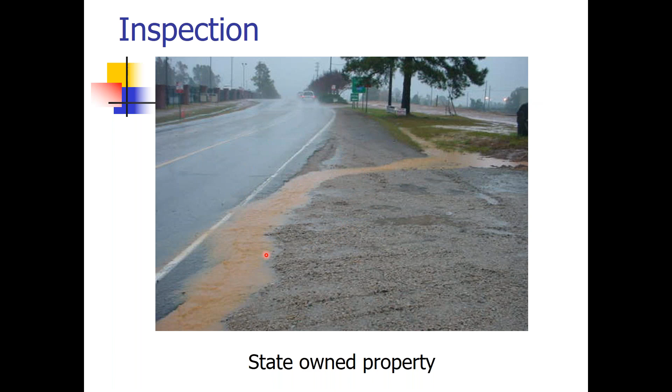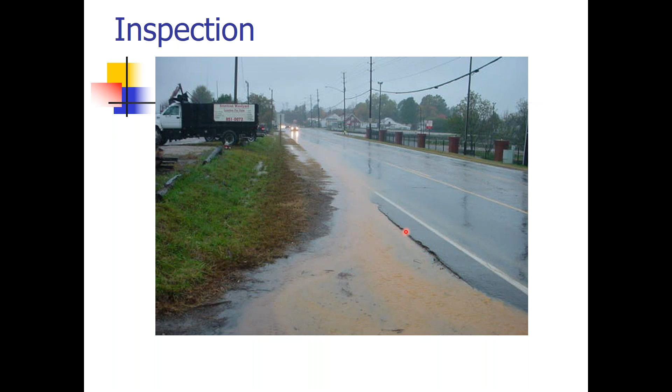We referenced this last class, some state-owned property that has some issues over where I'm at. It has gotten a little bit better, but we still have issues with water coming out into the roadway. And again, shot from the other side coming the opposite direction, you can see there's a nice drop off here, and it's collecting a very large pond of water. And over time, we have seen that cracking is going to continue, and eventually that water is going to get underneath the surface and go further out.

Here's some water that's standing on pavement, and this was just resurfaced not long before this. And that tells me if that was resurfaced and water's still standing like that, it's not going anywhere. It's very possible you could have a clogged drain somewhere around here, but more probably, I think maybe not the crown on the road. The road is not angled to drain the way that it needs to, which means we've got to get people out there. We've got to resurface it again.

And then we end up in an issue of, well, who's responsible for the pavement? Well, my feeling is if the contractor did it, the contractor should be responsible. But we have to deal with that as a public agency when these issues take place.

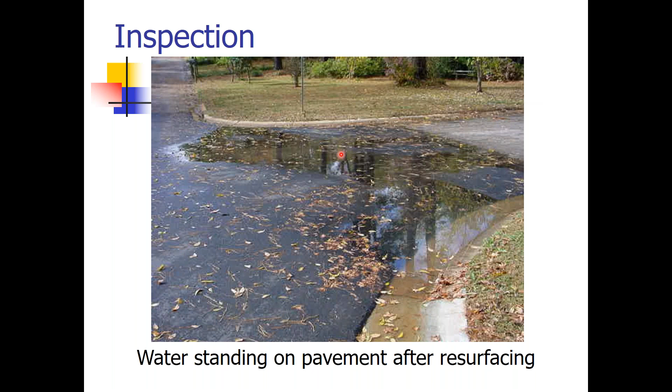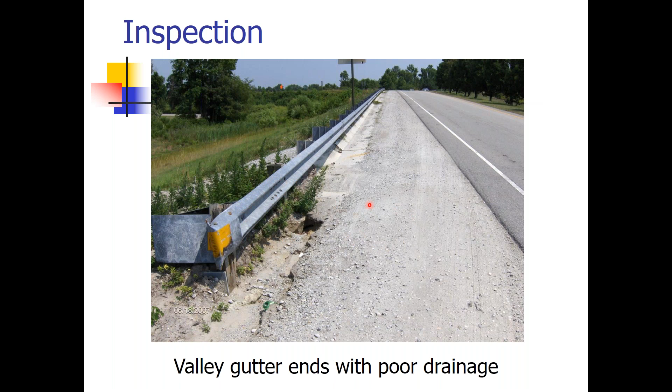They decided to put a valley gutter in this picture, which is okay. You know, the water's going to flow down that valley. The problem is they get to this point and there's that big old hole right there. If that were where the grate was, if that were where the catch basin was or the slope drain, that would be one thing, but it's not. That's just a big hole and the water's just going to go down and it's going to go underneath and we can't see where the water's going to go, but we can just imagine it's going to continue to erode either the slope on this side or get underneath the shoulder and the pavement right there.

I don't know if you remember from the very first day we started this, we said for every dollar spent, it saves $4. So we want to make sure that we're spending the amount we need, but not exceeding it, because again, we're all taxpayers and we want to make sure we're being wise servants and using that money correctly.

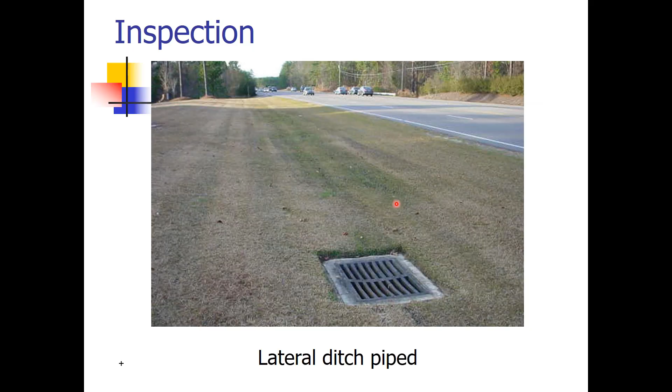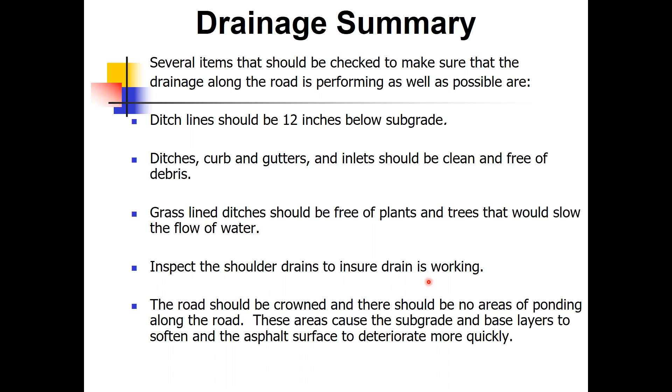And to that, I have a question for everyone here, and that is, we get a lot of phone calls, especially as local agencies. Farmer John needs a new culvert placed under a roadway so his cattle can get through. Or Mrs. Smith calls because she bought a home right next to a swampy area and she wants us to drain that area because she's having trouble selling her home. Perhaps you've gotten a call where there's a beaver on property and that's causing water to back up because they're building beaver dams everywhere. Now we've got water into the roadway.

And there's various other situations that we have, but the one thing I want to ask of you is represent your agency well when you're dealing with the public, because part of this job is public relations, whether we like it or not. Homeowners, business owners may not understand where we're coming from. They may be confrontational at times, maybe even agitated. We have to make sure we're being the best representative of our agency that we can. My grandmama always told me you catch more flies with honey than vinegar, and it's hard, it's difficult.

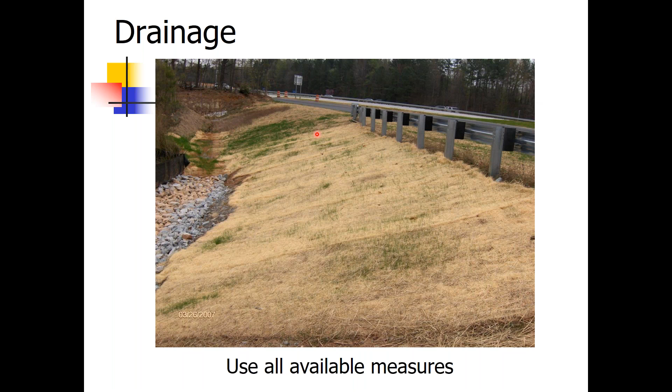And having said that, I drew up 3 poll questions. Ms. Victoria, if you would ask those, we'll go over those real quick, and then we'll have a few minutes for questions before we sign off. Absolutely. I put the first one out there. Riprap is used in a live stream, true or false?

And while they're answering that, we did have a couple of questions that came in, and it relates all the way back to the beginning when you were talking about the geotextile fabrics. Okay. Is the fabric wrapped around the stone, or is it just not shown in the image that you had up on the screen? It is not shown in the image. What we will do when we're putting down a geotextile is sometimes we'll pin it down with stone to hold it in place. But we are not wrapping it around a stone. We're laying it flat. That way we get better compaction over the top of it.

We don't want to wrap it around because then the water won't flow through the way we want. And then you'll have water pooling between the pavement and where that geotextile is. And that's not what we want to have happen. So no, please do not wrap the geotextile around the rocks.

Okay, your question is complete. I've got the results up. 12% said true and 88% said false. And there were 5 people in the question box that said false as well. Okay. And when we talk about riprap, the rock, the stone, and I appreciate everyone who voted on that, thank you for participating throughout this time. We want to make sure that if the water is flowing through there and all it's doing is catching the sediment and the dirt and allowing the water to flow through, it's okay to have our riprap out there.

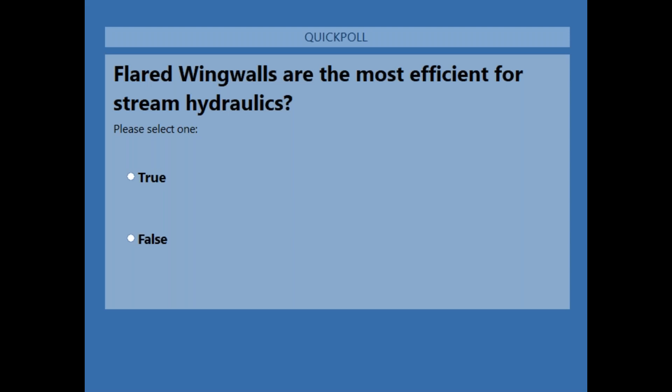And they're almost halfway through voting right now. So okay, all right. Okay, we're almost there. They picked up speed. Okay, I'm going to close this poll and share the results. All right. 3 people in the question box said true, along with the 95% who chose true through the polling feature, and 5% said false.

And when we talk about flared wing walls, one of the things to consider is when we have just the reinforced concrete pipe, the water's going to flow, not a question. But once it gets to the end of the reinforced concrete pipe, where does the water flow? When we use the flared wing walls on the side, it allows the water to flow out, run along the flared wing wall, and still move water further out. So that is correct. Flared wing walls are the best for stream hydraulics. And again, I am not a hydrology engineer, so we're not going to go any further than that. But that is the best way for that ended pipe to get water, especially when you have heavy amounts of water flowing through.

And I believe there's a third poll. Yep, I've got it up already. Sweet. So what types of problems can reveal themselves on a rainy day inspection? Settlement failure near rock check dams, pipes not flowing fully, standing water on a roadway, or all of the above.

And while they're answering that and getting the percentage up here, I have to share that there's this video phenomena out there on YouTube. I don't know if you've ever seen it, where people go out and just record cleaning out blocked storm drains and how quickly the water runs out. It's a crazy thing. My teenagers watch it. So. I've not seen the video. I've lived it though, and you're absolutely right. It's amazing what'll flow when you unstop those areas.

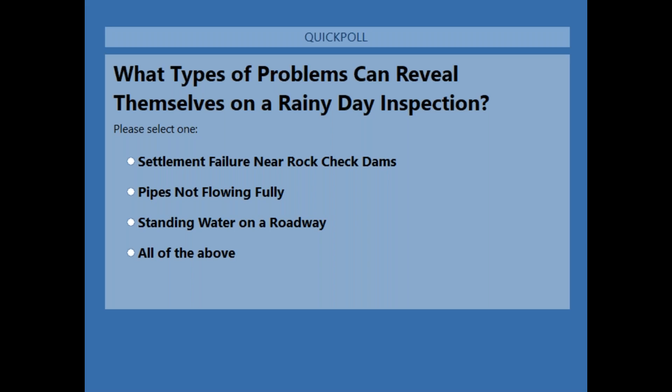Yep. Okay, we shared the results, and I had 4 people in the question box that said all of the above, along with 97% on the poll. 3% chose standing water on a roadway. So there you go. And I appreciate it, again, everyone who weighed in on that. It is all of the above. Each of those things can be revealed when we do our rainy day patrols.

And for the 3%, I believe, that selected the standing water on the roadway, that is a very important part. It is absolutely important to see, is that water standing? But when we're out there on the travel way, not only can we see that, we can see some of the other issues. Is the water flowing through the ditches properly, or is it standing? Is the water getting off the road, or the shoulders cut the right way? There's a lot of different things to see. But water standing on the roadway is very, very important. But actually, all those things can be seen, plus a whole lot more. I mean, there's a lot to this that our men and women deal with on a daily basis.